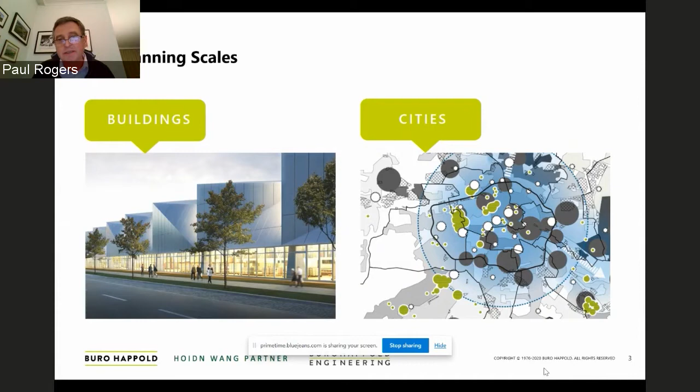As John said, I am actually a structural engineer by training, so I've been working historically in building engineering design, but we're doing more and more work in city planning and urban scale, in regional and district scale. And tonight we're talking more about our district and cities type work. I'm delighted to be speaking to an audience perhaps largely made up of students, but I can't imagine there's been a more exciting time to be training and be considering a future career in city and district scale planning. Some of the themes that we're having to deal with today and understand, and some of the transitionary trends going across this sector.

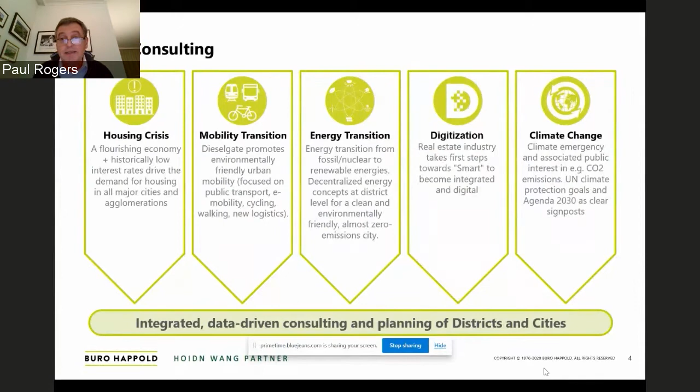We know housing is in short demand, good quality and affordable housing. In Germany, we have a Dieselgate, but there's a mobility transition, electrification of mobility, and moving away from private mobility forms to public shared forms. There's an energy transition away from fossil and nuclear fuels to renewables. All of that is linked by technology and smart technology, digitization agenda. And probably the biggest challenge of all, we have a climate emergency, and our skills are needed in responding to that. And I'll come back to that later because that is a core part of our competition response.

Just to give a little bit of context into Berlin-Brandenburg 2070, Berlin is a city of about 3.6, 3.7 million people. Brandenburg is about 2.5 million people. I don't suppose from a population density either of these regions or cities are particularly high in the scale of their equivalents around the globe. Just to give an idea of the size of Brandenburg, if you drove north to south, I guess it would take about 3 hours. If you drove east to west, it would take probably 2 hours.

In preparing for the competition, we did a little bit of context work, and these few slides here just help to show some of the tools that we also work in. This is in GIS. There are a lot of open source data sources in which you can collect data. So we were looking at a number of themes in here. We were looking at social justice, living conditions, things like hospitals, universities, colleges, education, etc.

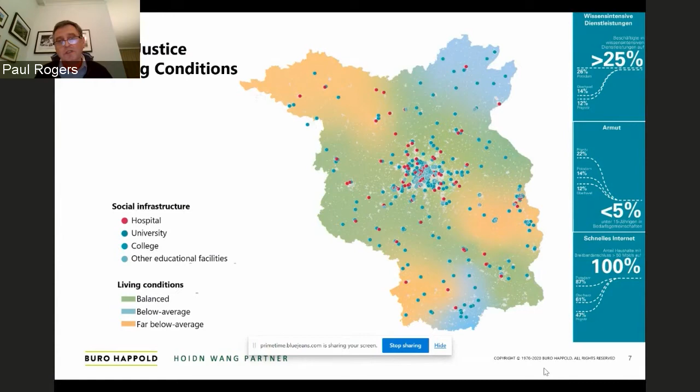And of course, you start to see around Berlin, there's quite good provision. Other parts of Brandenburg in the early 90s, there was a de-densification post-unification. Therefore, these areas are slightly below average in their service levels. Not that we're trying to turn the whole of this diagram green. On the contrary, there's a cost of providing infrastructure services and social services, and therefore, we're still building context.

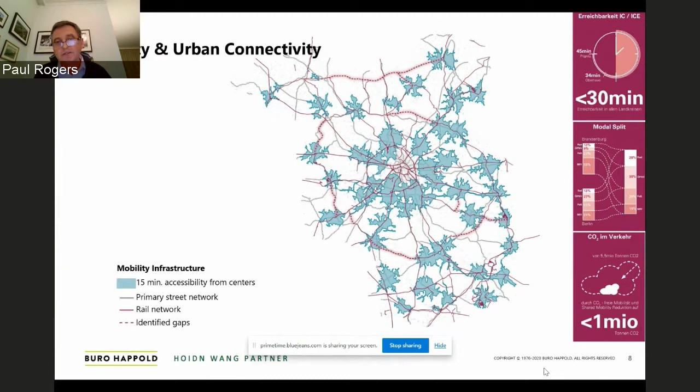Moving on to mobility and urban connectivity, you can start to see the network of urban centers around Berlin. I don't want to call them secondary or satellite centers. I think they're an important part of the structure that we're looking to develop. They're quite well distributed, and if you analyze the current connectivity, it's actually not bad, and you start to see some of the areas, whether through street networks or rail networks, we need to start infilling to create a better pattern and a more resilient pattern.

Going on to food, ecosystem, agriculture, there's a lot of land in Brandenburg, there's a lot of protected area, there's a lot of agricultural land. There's actually quite a lot of water, and it's very interesting the last few summers. Nevertheless, there's been talk of a slight challenge in terms of water supply, and that's not just within Brandenburg, that's across region and actually across border regions slowly. So you start to see the scale of some of the issues we're working with.

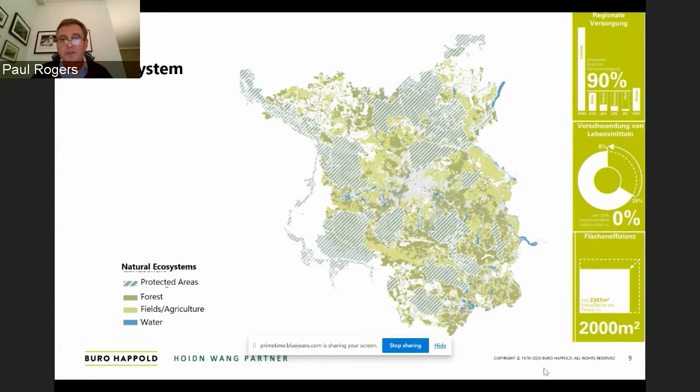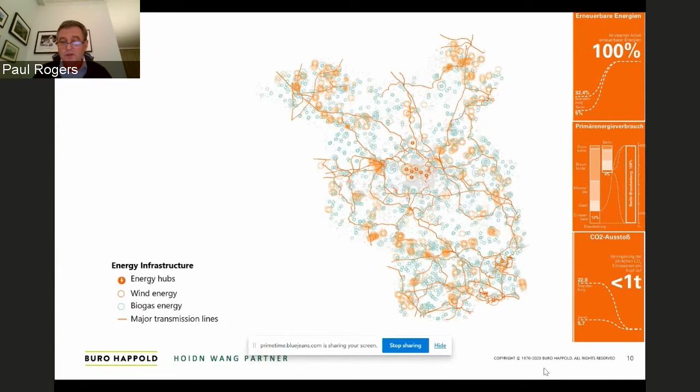And finally, energy, renewable energy is becoming part of the landscape of Brandenburg. There's been some quite significant investments, but there still needs to be much more, and significant investments in distribution networks to move energy around the country, and above all, to store it. And I'll touch upon that theme a little bit later. So that's just a little bit of context in terms of Brandenburg.

So just moving to the competition and where we started. The competition Berlin-Brandenburg 2070 demands consideration of a future strategic plan for our region. It's 50 years from now. That's quite a long time. United Nations, European Union goals require or mandate that we're carbon neutral in terms of greenhouse gas emissions by 2050. Therefore, we really are fighting a climate emergency now.

Therefore, an integrated, holistic response to sustainable and carbon mitigation, I would say, is absolutely at the core of our thinking and of our proposition. Question, therefore, in the context of a regional plan, how do we holistically interpret sustainability and a carbon neutral response? For this competition, we chose to consider the efficient, smart, sensible use of resource. And by resource, we meant material resource such as energy, water, agricultural land, natural resource in the natural landscape, and immaterial resources like governance, research and education, culture and experience.

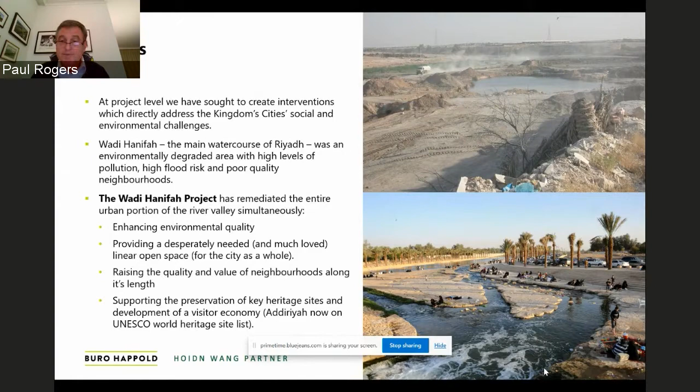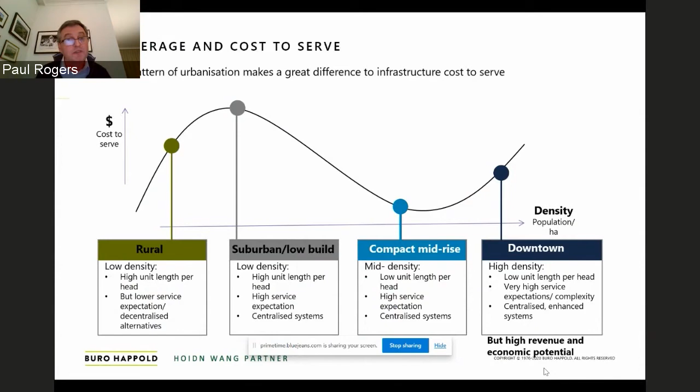And what we found in Detroit, and we could have brought this into the competition in Berlin-Brandenburg had we had more time and resource, is that what was working in this city was a compact, mid-rise, medium density solution. What's interesting about that is the cost to serve level of infrastructure is actually quite low, particularly in comparison to the suburban, dare I say, sprawl, low density solution where the cost is very high. And if you overlay the 15-minute city philosophy onto those more compact urban centres, you start to get an urban model and an affordability around providing infrastructure to serve that model.

And I think I can just follow these slides. My last slide really is quite interesting. 10 years down the road, you now see a lot of private development, and we're actually involved in 3 or 4 projects at a building scale in Detroit. So you see how the urban planning component leads into the building development in a cyclic form as well. But I'll stop there, stop sharing, and pass on to Wilfried, who will pick up from that point.

Thank you, Paul. If I turn off my... Thank you, Paul.

So the jump from the large-scale view of Brandenburg and the impact on Berlin is obviously quite significant. What I would like to do is to begin with the key argument that the team confronted, which is what are the essential components that lead us to certain decisions. Together with John and his colleagues from Chalmers University, Meta Berghauser-Pont and Lars Marcus, and Chen Fang, who worked with us at UT,

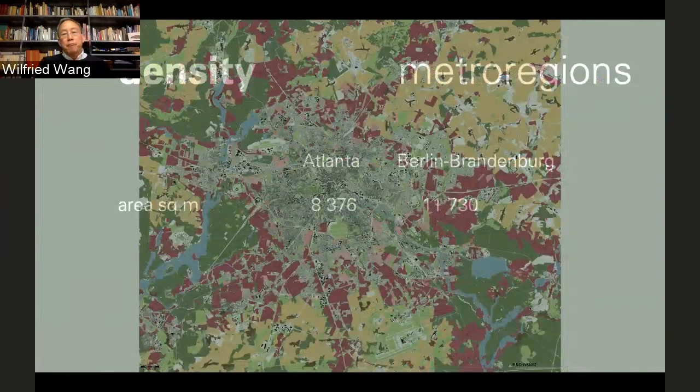In the metro region, Metro Atlanta has an area of 8,376 square miles, and Berlin is a little bit bigger. The population is interestingly almost identical, and the densities are comparable. If you then go to the cities, Berlin as a city territory is significantly larger than Atlanta. The population is much larger, almost 8 times the size. And so you get a significant difference in density.

The number of people per square mile is almost 3 times that of Atlanta, 11,000 people per square mile. If we go to well-known districts in Berlin and Atlanta, Buckhead is a well-known area and happens to be almost the same size as Prenzlauer Berg, of 4.7 to 4.23 square miles. The population is interesting. It's relatively high in Buckhead, but twice in Prenzlauer Berg. And so we have these different densities.

As it happens, Prenzlauer Berg is one of the most popular districts in Berlin. It has the highest rate of newborn children. And so it's also one of the places where people want to be. We talk about sustainability. I'll just give you these figures. The tonnage of CO2 emissions per person per annum in Atlanta is 18.7. In Berlin, it's 4.7. And Berlin is pledged to go down by half. You can see the distance that Atlanta has to go to reach a comparable level.

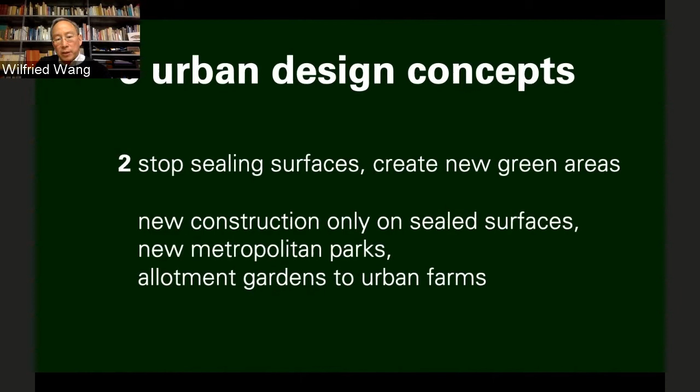If we agreed to not increase the component of sealed surfaces, and if we also were to strive to create new green areas, new parks, that means we would try to create new metropolitan parks inside the territory of Berlin, and also to review the use of allotment gardens that exist significantly in Berlin. About 7.7% of the total built area of Berlin consists of allotment gardens, and we would advise government to convert those into buildings with urban farms. I'll show that in a case in a moment. 35% of Berlin is already sealed, and that should be the upper limit.

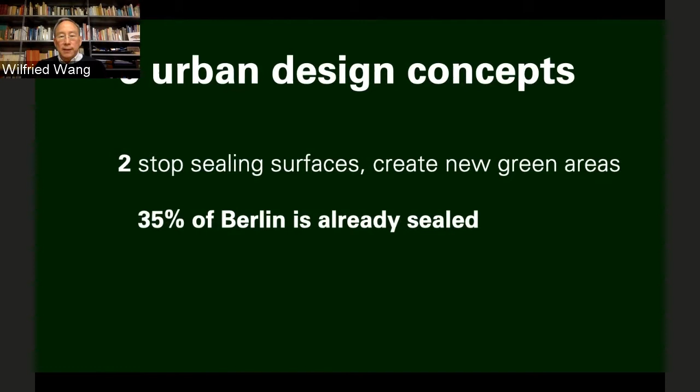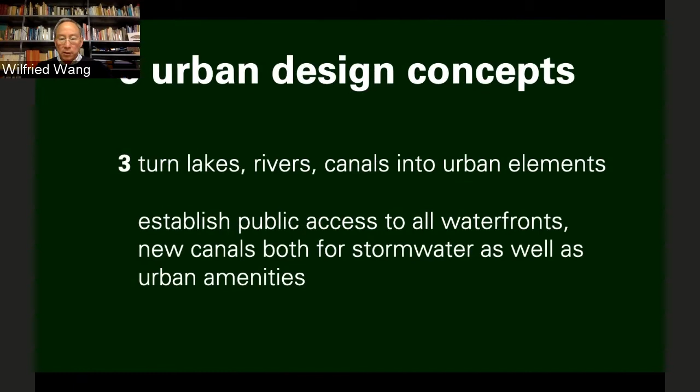And in terms of the kind of ability for people who live and work in a large city, there should be the option of living and working in close proximity to one another. So functional mix is an important consideration, as is the continued upholding of the Berlin tradition of having social mixes. So we want to discourage the increased gentrification, the kind of pushing to the margins of socially weaker segments of the population to the periphery.

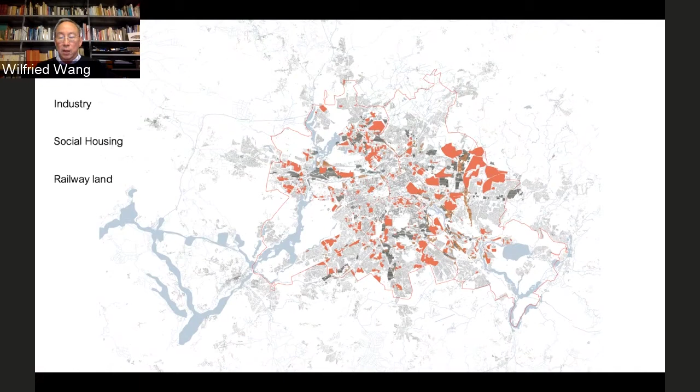So when we looked at Berlin, we created these series of analytical maps that showed where potential development areas were. And there are some industrial sites that can be revitalized, can be transformed. There are significant areas of social housing over the last 100 years that can be densified. There's a potential for another almost 1 million units in this red area. In the brown area, there is plenty of railway land in significant central locations, which can be developed.

We want to recommend a different kind of use of public space, of the streets. And one of the key issues that we're proposing is to change the inner city motorway that runs from the north west around the south to the southeast. And we are proposing that the so-called Dog's Head should be turned into a single large, over 30-mile long boulevard. So the sunken motorway should be covered. That is a significant infrastructural project.

In addition to that, the large, historically important arterial roads should be intensified and be upzoned to include taller buildings, and thereby changing the character of what are now sometimes somewhat provincial radial roads.

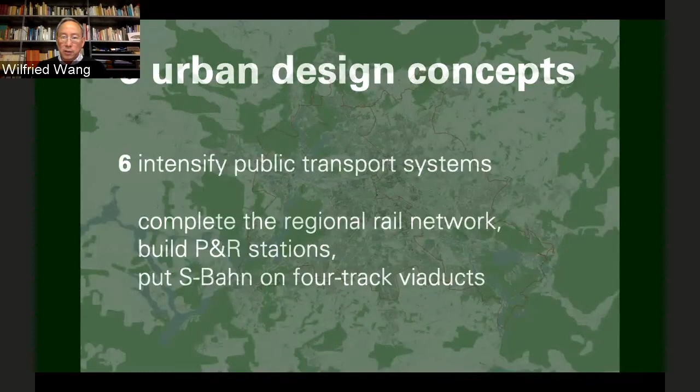The ring motorway would be given a series of park and ride stations where the car traffic from Brandenburg would be able to change and then join the public transport system of the inner city of Berlin.

So in summary, these are the different considerations and the impact that the strategic approaches of these 6 design concepts would have on Berlin. I appreciate this is just a diagram, but let me give you a kind of basic framework. Our proposal has the capacity to increase the city's population by 1.5 to 2 million people. So we would go from 3.7 to 5.2 or 5.7 million people, and that would increase the density from currently 11,000 to around 15 or 16,000 people per square mile.

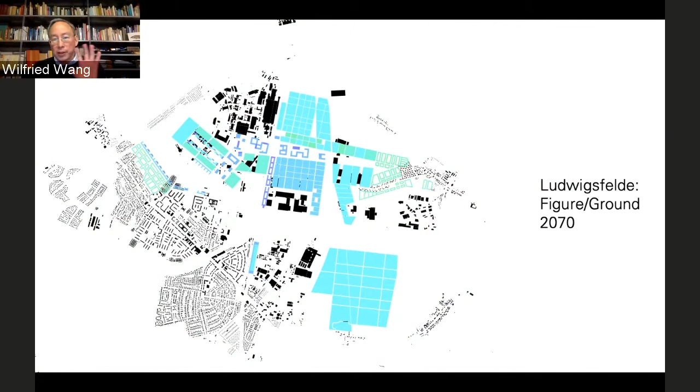And we want to provide them with a sense of future development that doesn't erase the landscape identity of it, on the contrary, but that concentrates the development. So this is the proposal for Ludwigsfelde. It's one that has caught the imagination of the mayor, and Barbara, who has made a presentation with the mayor last week, was able to convince the mayor that this was a proposal worth discussing with the local population and the planning people there. So we will look forward to kind of a detailed exploration there.

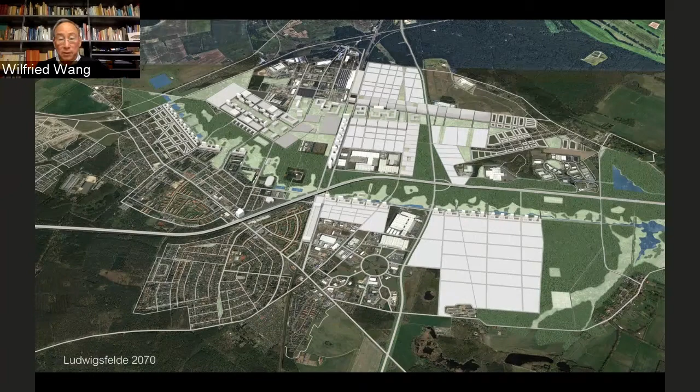But let me just point out, we recommended that the railway cutting should be covered so that the east-west connections would be possible, and a number of other things which I won't go into, but we won't shy away from large infrastructural investments. So that's the final image.

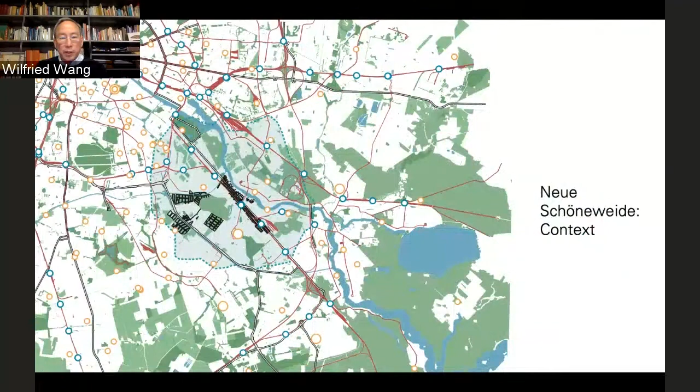For the second site in the east, it's directly related to the Spree, and is also suffering from a series of island conditions, which we were interested in improving by creating a new network, and also by addressing a deficit in landscape along the river. There is an existing park which we're not changing. But the allotment gardens that you see here, this is a kind of Berlin favelas.

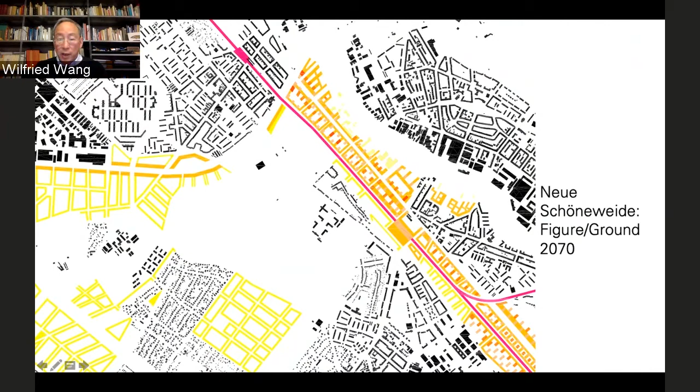We are recommending that there should be peripheral development of 2.5 stories height with urban farming on the inside, and a high density development along this artery, which is one of the typological proposals we have for Berlin as a whole. So these are the summary views of the three-dimensional proposal. So you see a range of differently scaled high-rise buildings with the traditional Berlin perimeter block. You see here the perimeter development with the urban farming.

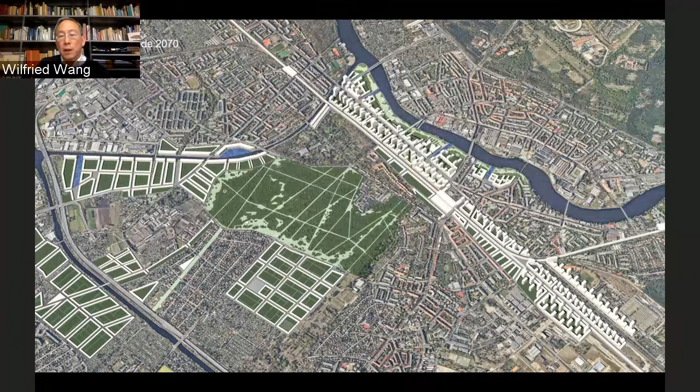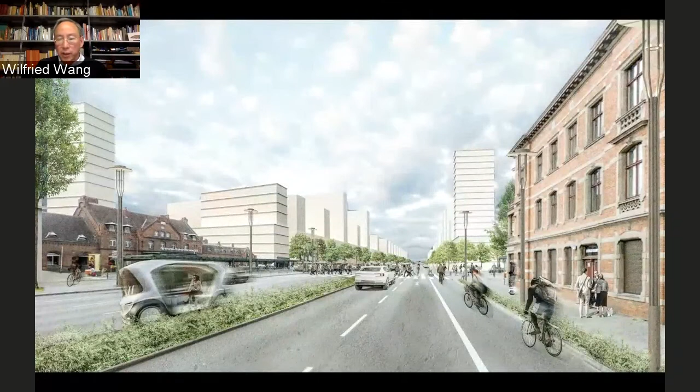And this is a view along the major artery as it is now, and our proposal for the densification of this. And finally, with Westkreuz, which is in the west, we have the Avus motorway from the 1920s meet the inner city motorway here, with the exhibition grounds there and with the traditional 19th century fabric. So you can see something familiar to you all, and a huge infrastructural node with railway lines here, motorways, and motorways here.

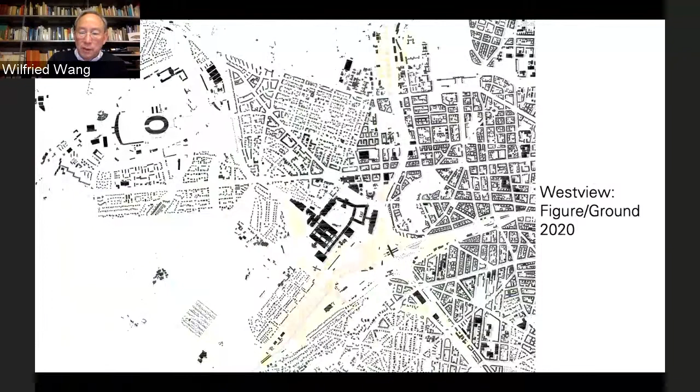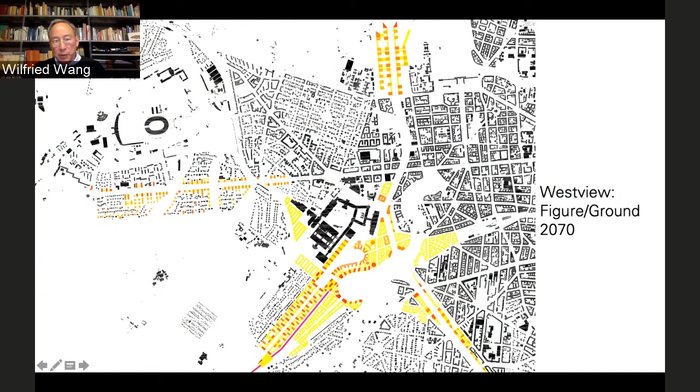And our attempt to clean this, so to speak, by covering the motorway cuttings with a boulevard, and by introducing a new interlocking series of parks into one large lake-based park that connects to this one here. And from this diagram, you can see that essentially we are proposing construction in areas that otherwise are infrastructural areas or underused railway land. On the western side, we are intensifying the villa structure and building higher buildings along this arterial road.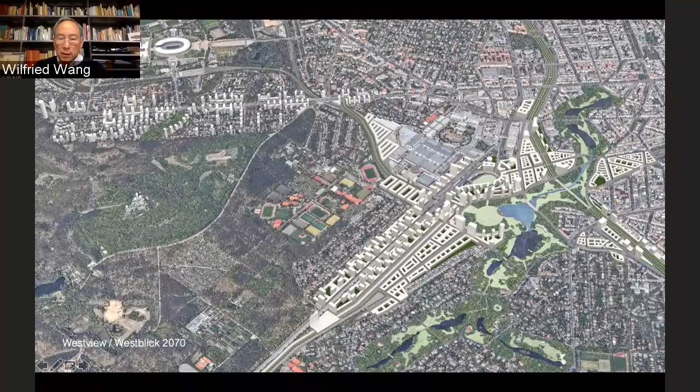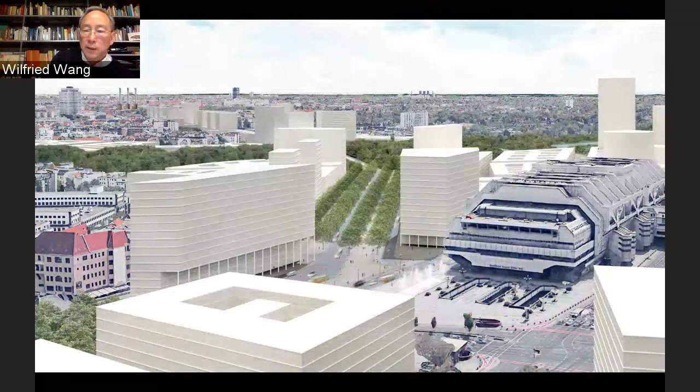And so here are a series of final perspective studies. You see the motorway system here with the spaghetti junction. And all of that either goes into tunnel or it is domesticated into normal urban streets. And a park is now allowed to connect to the south. A detailed view around the conference center here, which gives you a view of the different levels of infrastructure. That would all be covered up and transformed into this boulevard that goes around the entire inner city of Berlin.

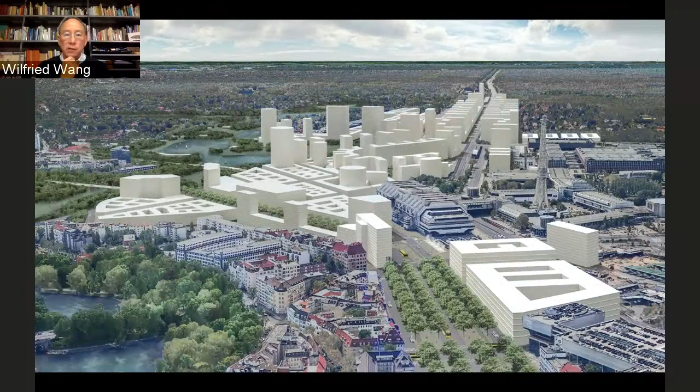And the final perspective overlay shows you the enormous work that this would represent and this enormous investment that, of course, would lie ahead if it were ever to be decided. Thank you very much.

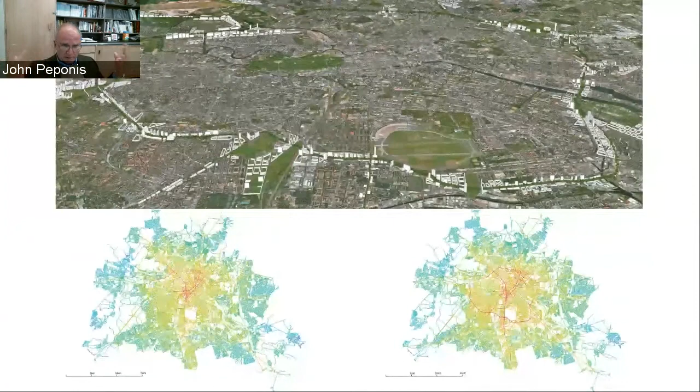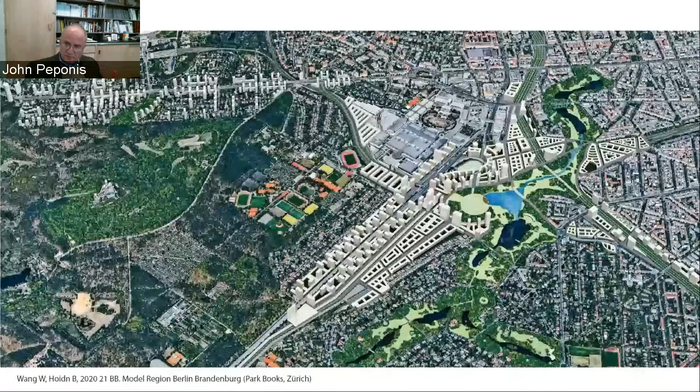And we then looked at the individual areas. This is Westview that Wilfried ended with. And as Wilfried showed, we sort of worked together to create the new street layout that will replace the existing. We did that in a way that allows for the continuity of new parks, so that there is more frontage onto those parks. And we then worked to distribute the density.

And if I may call it, the classic space syntax analysis was all about making sure that we recognize what are the best flows that will run into the new development coming from the surroundings. Because obviously in every urban design effort, it is of vital importance to ensure that the new development improves everything around it rather than act as an isolated enclave. So we did street layout analysis to pick up and intensify as much as possible the flows coming in.

But then we did, and this is where the contribution of the Chalmers University of Technology was more significant, we studied the new distribution of development density, shown in red, the new kinds of accessibility to significant amenities like projected schools or other facilities of relevance, and the new accessibility to green areas.

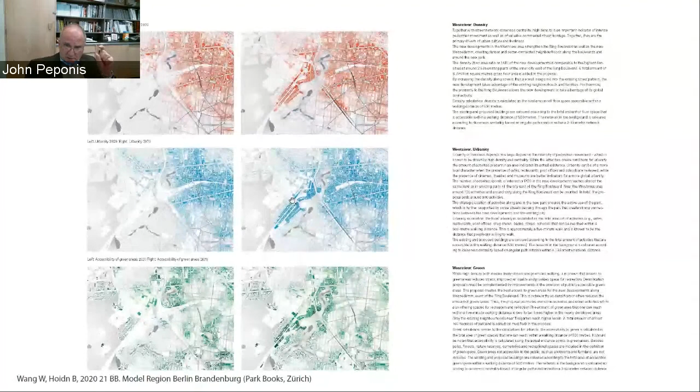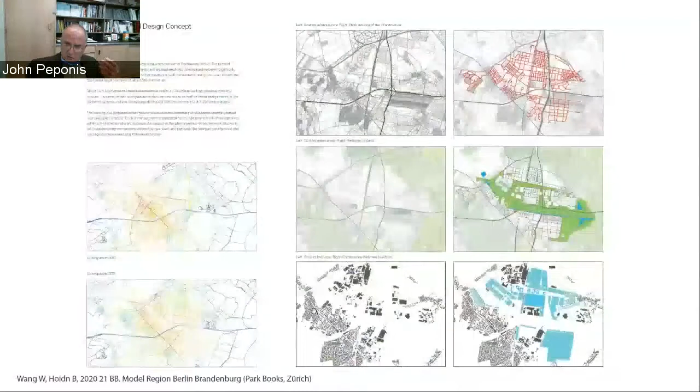And so basically, as you see more intense red or more intense blue or more intense green, you're essentially looking at increases in accessible density of different kinds: generic accessible density to urban development, accessibility to particular facilities of interest, and accessibility to green areas. And this was repeated over the three sites, and I don't need to spend time going over each one of them. I think you get the gist of it.

Now, everybody at Georgia Tech, I guess, has some idea about what space syntax is, but I'd like to briefly summarize it for those that are not familiar. It's essentially a descriptive theory of the affordances of inhabited space that impact human function, to put it very simply. But when it comes to cities, which is the particular issue that we're dealing with today, the difficulty is to take these very complex objects that we create and sort of understand how to measure their evident functionality.

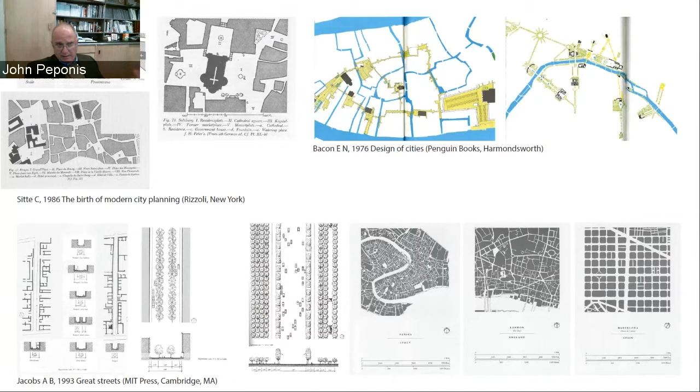The extraordinary thing about cities is that they grow piecemeal over time, sometimes without a plan, sometimes with retrospective plans enforced, and they are still very intelligible and very functional. And our typical theories about cities stay intuitive, or if they do propose quantification, they propose quantification at pretty simple levels, like the number of blocks per area, which is a good indicator of the grain of the urban fabric, but not very discriminating, for example, about the type of street system, whether it is a regular grid or an organic, irregular one. And as a consequence of not having particularly powerful descriptive tools, our theoretical intuitions remain diagrammatic. And the problem with that is that it's very difficult to check how they translate into design decisions.

And so the primary focus of space syntax is to understand how cities foster contact of different kinds: social contact, economic contact and exchange, intellectual contact and exchange, and cultural contact. It is the ability of cities to foster contact that underpins their ability to promote social and economic and cultural prosperity. And the street network is the long-term framework that makes contact possible. So that's what we're looking at.

And as part of that, we are interested in this analysis of centrality patterns. But when one thinks about centrality, it's very important to think what measure we use. And so typically we use metric distance, which is of course linked to physical effort. But the way that cities become intelligible has to do with the way they handle something we might call very simply perceptual distance.

How far down the road can I see? How many turns do I need to take to go wherever it is that I'm going? And it is this cognitive distance that actually affects social function even more than metric distance. And it can be measured in a number of ways, by the angle turns of a path, or by the number of vistas you need to change as you move. And that's the kind of thing that space syntax brings to the table.

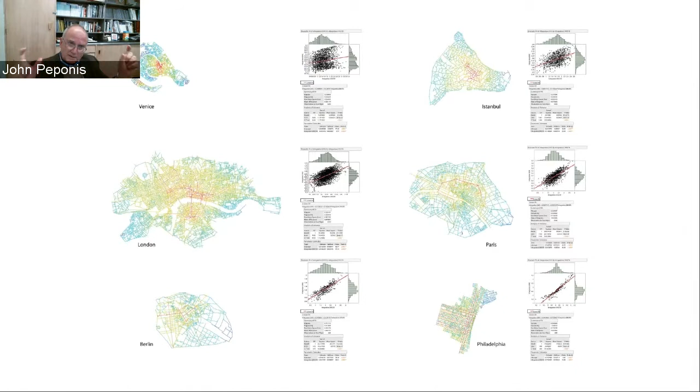Now, the other thing that we do recently, thanks to the pioneering work of Lars Marcus and Meta Berghauser-Pont at Chalmers, is that we can incorporate density into the analysis of access and connectivity. Now, density is a very tricky concept in urban planning. And we usually use very aggregate measures of density, like people or employment or built space per square mile or something. And these are very good high-level indicators of what is going on, but they have no descriptive power if we want to understand how things function.

So for those of us that live in Atlanta, Buckhead has a very high density of development of offices at its center, but it's not all very accessible. It is quite a trick to move from the blocks inside the Buckhead loop, let's say, to Lenox Square. Whereas Midtown has comparable kinds of density, which is very easily accessible from everywhere. So the significant issue is how to measure density as accessible density.

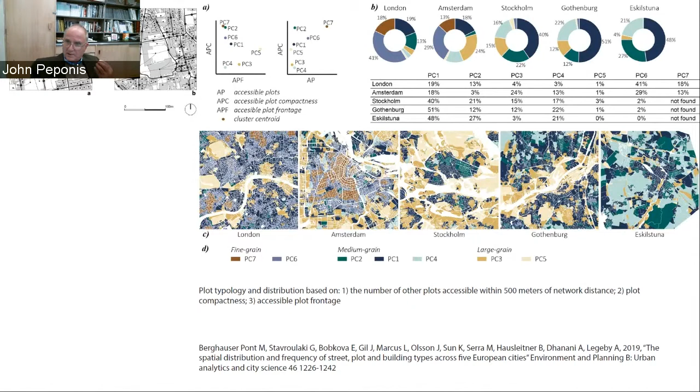And what one can do is one can begin to link properties to streets, and as a first step, talk about the potentiality represented by properties. The number of properties and their frontages and their shapes is obviously a driver of what development can occur. And so this is an example from the work at Chalmers, comparing the distribution of different kinds of properties over the city. But then we can add the actual morphologies of built space.

And what Meta Berghauser-Pont has done so well is to create this multidimensional description of morphology, where we essentially plot FAR, plot coverage, and open space. And we can sort of describe different characteristics, patterns of development in quantitative terms, and then see how those are distributed over different cities and establish benchmarks.

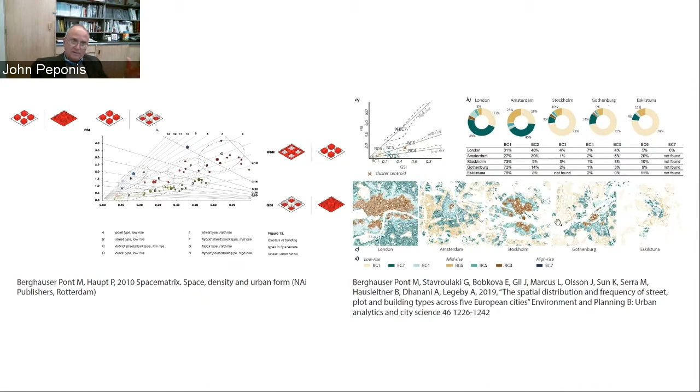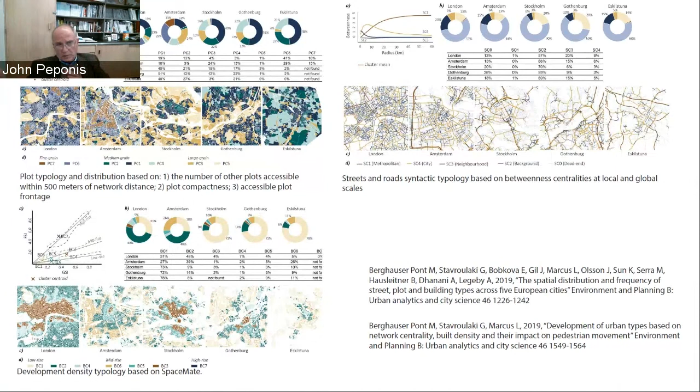And finally, we can, in a much more complicated fashion, but very simple conceptually, actually relate type of streets to type of development density. So, for example, are the freestanding pavilion-type housing estates associated with secluded streets and socially neglected areas, or are they found more in streets that are essential to the vitality of the city?

So these are the things that space syntax brings to the table in principle. The significant question, since we are talking here about a practice-university collaboration, is what makes anything like space syntax credible.

It's not sufficient to have precise and transparent descriptions. One needs to question what's the knowledge base that convinces us that these descriptions have any value. Now, it's a question that resonates with me. I remember that when I was at the Bartlett as a student, this was the tail end of what at the time seemed like a significant debate.

On the one hand, Doxiadis had finished Islamabad in '68, and this was his attempt to bring modernism back into Hippodamian-type planning principles, to create essentially grids that would embed neighborhoods in slightly larger areas, and those larger areas into the city as a whole. He was still obsessed by notions of hierarchy that we don't think describe cities well, and he was still obsessed to offset the grids in order to distinguish one neighborhood from the next.

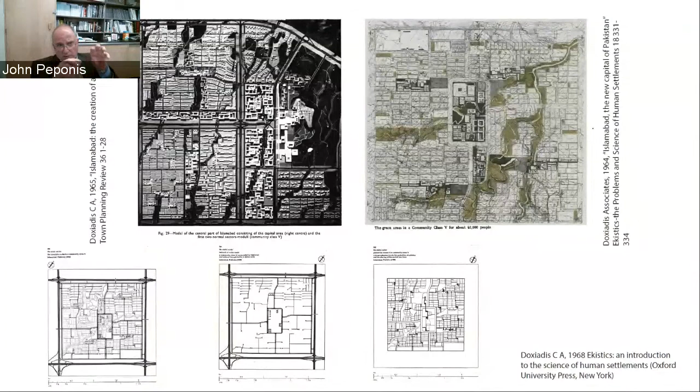But at least he was countering very deliberately the kind of modernist planning that we associate with CIAM, as represented, for example, by Chandigarh, which is underpinned by this separation of neighborhoods through a denser packing of high-speed roads, and then fragmentation inside the sectors by creating cluster developments rather than continuous streets.

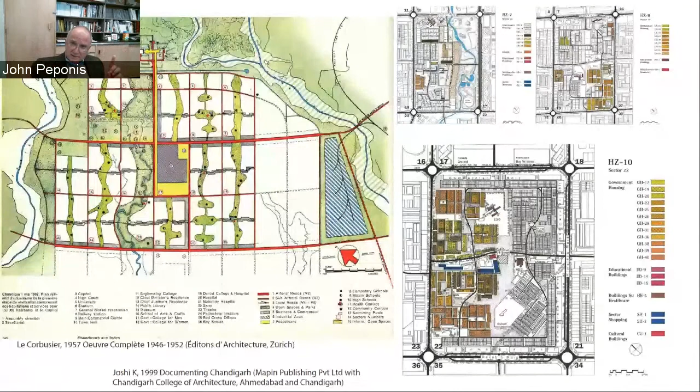Nevertheless, his friend, Llewelyn-Davies, influenced by Melvin Webber, was advocating a new kind of city where space would not matter, where what's next to you would not count, because everybody would be so wonderfully mobile, and everybody would access any facility anywhere. And I'm, of course, referring to Milton Keynes, the last major new town in Britain, which was being studied and developed about the same time.

And this simply serves to underscore that in academia and in practice, we often have very different normative principles, and it's often quite hard to assess what will work. Maybe with energy efficient cars, or maybe other means of transportation, Milton Keynes, which is now abhorrent to most of us because it's so energy demanding, might become desirable again. So the underlying question is, what kind of knowledge can we build that goes beyond normative preferences?

And in a nutshell, what space syntax research has shown in the last 30 years or so are essentially three things. First, that the layout of streets drives not the amount of people on the street, that is partly a function of development density, but the distribution. So whether you'll get sharp transitions from lively areas to very quiet areas or dead areas, or whether you'll have a modulation of liveliness and encounter, is very much a function of the street grid, not of development density. That's what we call the principle of natural movement, because it almost happens across cultures and across cities, almost like a law of nature.

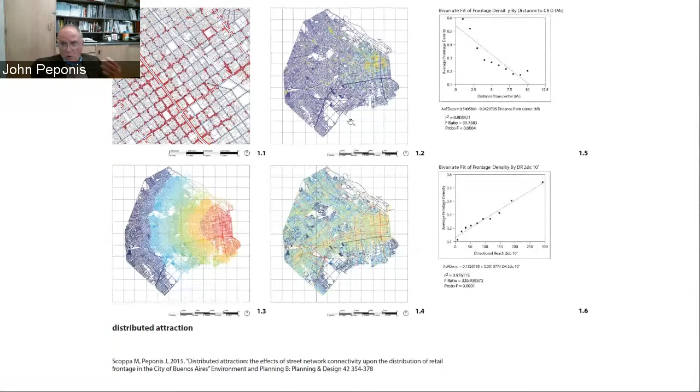And this has been intuitively known very well since the 30s, especially in America, the distinction between strip developments versus hub developments. But it has been tested time and again, including cities like Buenos Aires that almost seem to belong to the textbook case of a single CBD city.

And then the third thing that we learned is that those same relationships that drive the distribution of movement and the distribution of land use to a large extent, are also the ones that affect the way people understand the environment. So whether you talk about cognitive mapping or about the cognitive structure that people have of cities, you get back to those same variables of syntactic connectivity and centrality.

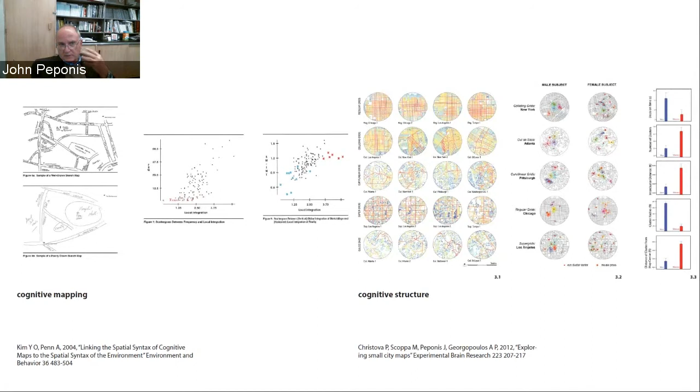So what this amounts to is the idea that the functionality and intelligibility of cities are subject to fundamental laws, if you want to call them that, and it is those objective constraints that then influence the way in which, as cultures, we invest in cities. And so on the side of intelligibility, I would place issues of interest like connectivity and differentiation, and very importantly, the interface of scales that Wilf has actually addressed so well.

And on the side of functionality, I would, of course, place questions like the distribution of land uses and how you distribute attraction over urban space to make it all more vital. And then, of course, under culture, I would place such more sensitive things like the economies of access, privileged and unprivileged people, food deserts versus well-supplied areas, social interfaces, whether we help people across incomes or cultures mix or not, and of course situational codes, by which I mean lifestyles and ways in which we sort of embrace the city as citizens.

And it is this kind of understanding of the interaction between objective constraint and social choice that an approach like space syntax brings to what essentially needs to be a socio-technical systems understanding of the city as a whole, which loops back to how Paul started us all by asking us to think about cities as essentially socio-technical systems.